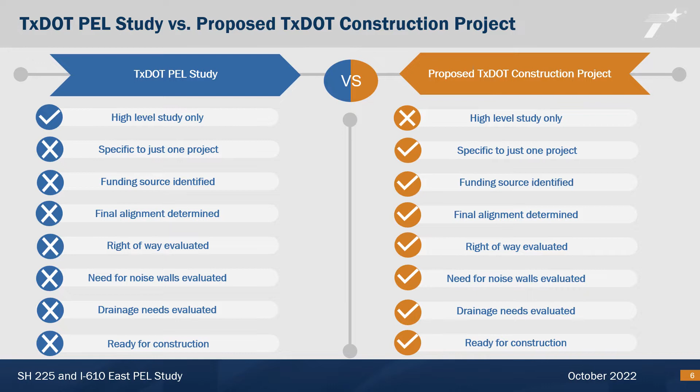A proposed TxDOT construction project is like building and planting your garden based on your earlier planning work. You would choose a specific place in your yard, determine how much space you would need, and then narrow down what you will plant based on the larger list you developed when planning the garden. Next, you would do all the work to plant your garden and then enjoy the benefits of fresh vegetables.

TxDOT is currently conducting a PEL study in Harris County of 2 roadways with specific beginning and ending points, referred to as the study limits. The State Highway 225 portion is approximately 14 miles long and includes the existing State Highway 225 corridor, beginning slightly west of the I-610 East interchange and ending at State Highway 146. The I-610 East portion is approximately 7.5 miles long and begins south of I-45 at Telephone Road, proceeds north over the Ship Channel Bridge, and ends at Gellhorn Drive.

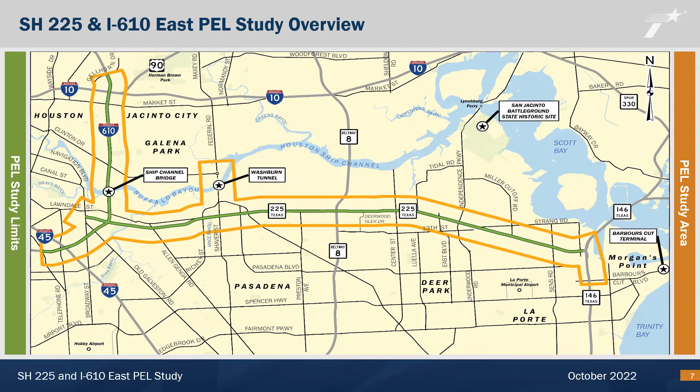There are 2 extensions of the study area: the Washburn Tunnel, located between I-610 East and Beltway 8 on the north side of State Highway 225, and Barbours Cut Boulevard, south of the State Highway 146 and State Highway 225 interchange. The study area includes 7 unique cities and supports significant industry in the area, including numerous petrochemical facilities and Port Houston container terminals. State Highway 225 also serves as the gateway to the historically significant San Jacinto Battleground via Independence Parkway.

There are 4 primary factors for why this corridor was chosen for a PEL study: safety, design, mobility, and community. Ensuring that all factors are evaluated with a focus on equity is key to the success of this PEL.

Safety is a top priority for TxDOT, which means identifying improvements to reduce crashes and fatalities is a crucial component of the PEL. Between 2017 and 2021, more than 200 serious crashes occurred within this corridor, resulting in 33 fatalities.

Design means the standards and specifications that TxDOT uses to ensure the highest safety and operational efficiency of its roadways. Due to the age of State Highway 225 and I-610 East, certain roadway components do not meet current minimum design standards. Mobility means enhancing the ability to freely move people and goods within the study area.

Both State Highway 225 and I-610 East are hurricane evacuation routes that must be designed and operated to provide a safe and effective option for evacuating people from the Gulf Coast region. Both facilities are also part of federal and state freight networks and are critical to the transportation of goods throughout the United States.

The community that makes up the PEL study area is a tapestry of diverse people, established neighborhoods, places of worship, schools, parks, and major employers. Identifying the transportation needs of the community through robust outreach and communication is key to enhancing safety, design, and mobility through this PEL study.

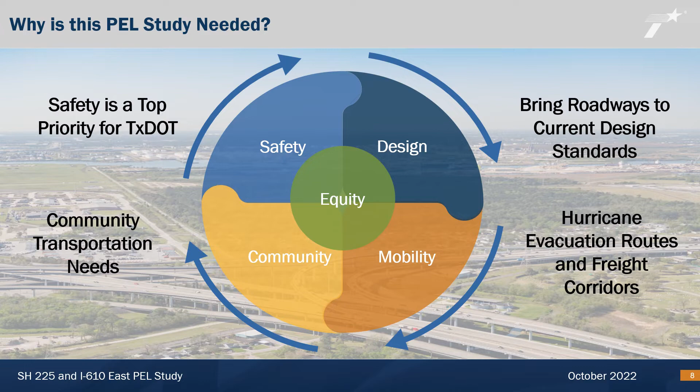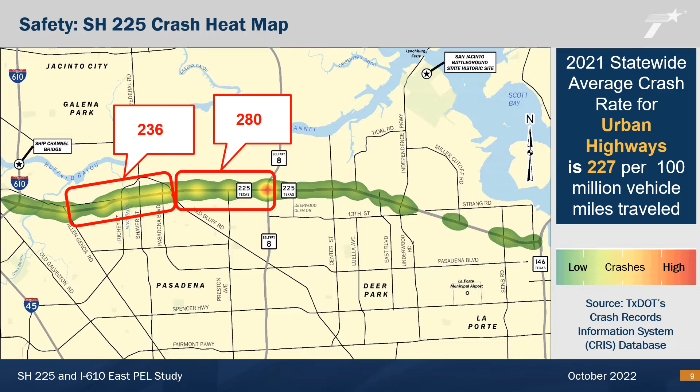The 2021 statewide average crash rate for urban highways is 227 per 100 million vehicle miles traveled. There are 2 locations on State Highway 225 that are above the statewide average. One is from Allen Genoa Road to Red Bluff Road, where the crash rate is 236, slightly higher than the statewide average. The second location is from Red Bluff Road to Beltway 8, where the crash rate is 280, or about 23% above the statewide average.

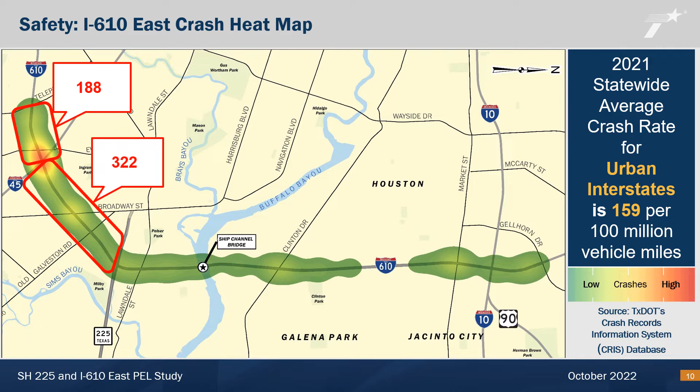The 2021 statewide average crash rate for urban interstates is 159 per 100 million vehicle miles traveled. There are 2 areas along I-610 East that are above the statewide average. The first location is between State Highway 225 and I-45, where the crash rate is 322, 2 times higher than the statewide average. The second location runs from I-45 to Telephone Road, where the crash rate is 188, about 18% higher than the statewide average.

The PEL study team obtained historic crash data from 2017 to 2021 to analyze crash and safety concerns within the study area. There were a total of 7,958 crashes reported during this time period, with 4,062 crashes reported along State Highway 225 and 3,896 reported along I-610 East. Of the total reported crashes, 70% occurred on the main lanes of State Highway 225 and I-610 East, with the remaining 30% occurring along the frontage roads.

15% of total crashes involved commercial vehicles. There were 28 crashes that involved pedestrians or bicyclists.

One approach to enhancing safety is to ensure roadways meet the most up-to-date design standards. The age of a roadway and the timeline of its construction often influence many critical design features, such as vertical clearances and right-of-way widths. The first portion of State Highway 225 near I-610 East was completed in 1966. Over the span of 30-plus years, construction continued moving east along the roadway and was eventually completed in the year 2000 at its current terminus with State Highway 146. Over this period, roadway design standards changed to adapt to evolving transportation needs, resulting in a variety of vertical clearances and differing right-of-way widths.

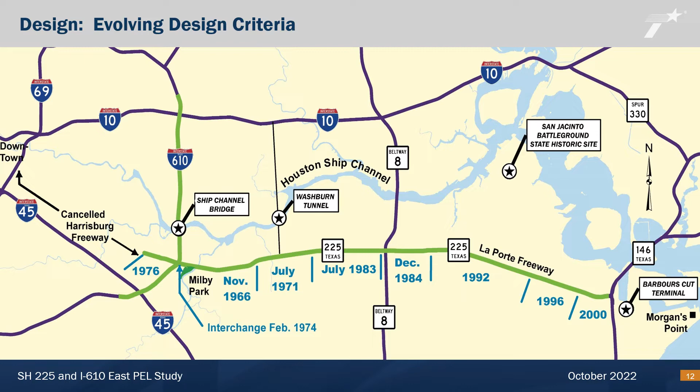I-610 East was constructed in the early to mid-1970s, including the construction of the Sidney Sherman Bridge over the Houston Ship Channel. The Sidney Sherman Bridge opened in March 1973 with a vertical clearance of approximately 135 feet. Modern-day ships require a much higher vertical bridge clearance, like the Fred Hartman Bridge and the Sam Houston Tollway Bridge, both of which have vertical clearances of 175 feet.

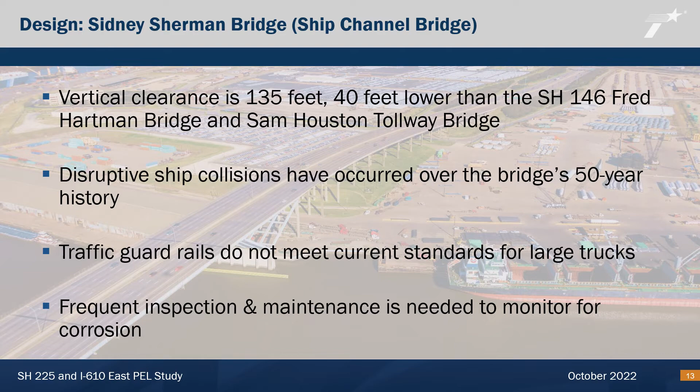The low vertical clearance of the Sidney Sherman Bridge has been a contributing factor to several costly and disruptive ship-bridge collisions. In addition to the insufficient vertical clearance, there are other key design and maintenance issues that require further evaluation, including traffic guardrails that do not meet current standards for large trucks and frequent inspection and maintenance to monitor for corrosion.

Another key transportation design feature within the PEL study area is the Washburn Tunnel, operated by the Harris County Toll Road Authority. The tunnel is the State Highway 225 connection point to Shaver Street, Richey Street, and Red Bluff Road. It is also used as an alternate route from I-610 East to connect to refineries and neighborhoods on the north side of the Sidney Sherman Bridge.

The tunnel opened in 1950 and has been on the National Register of Historic Places since 2008. The tunnel is a two-lane roadway that goes beneath the Houston Ship Channel. The top of the tunnel is 45 feet below the waterline and limits how deep the Houston Ship Channel can be dredged in this area.

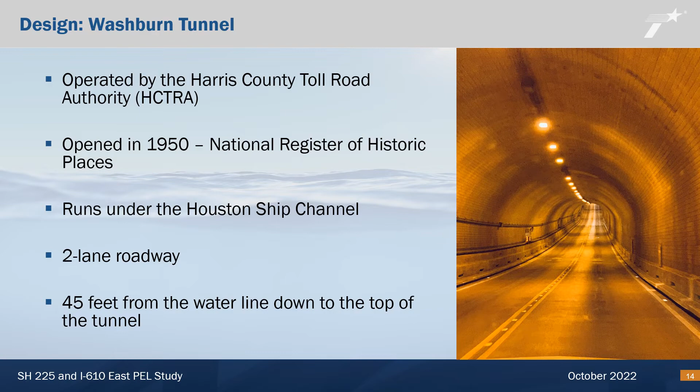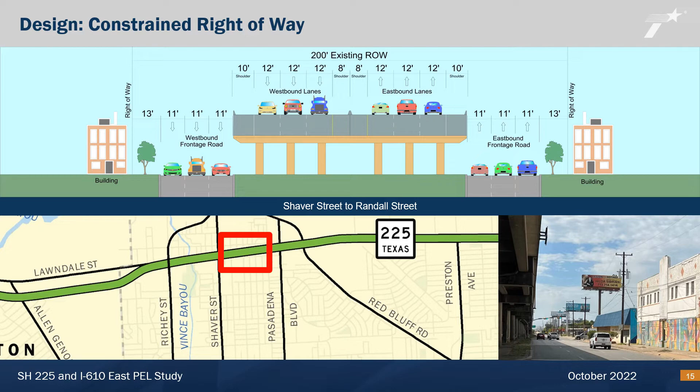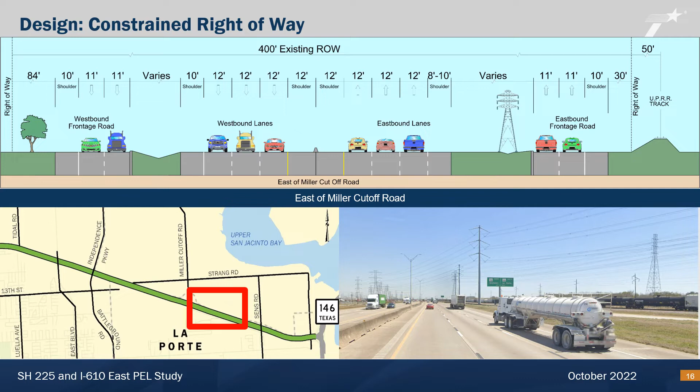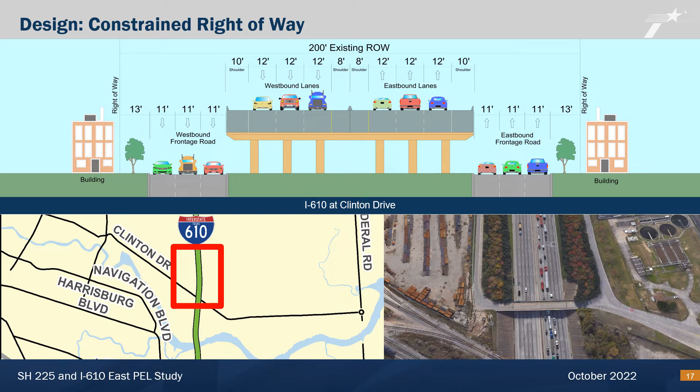Another example along State Highway 225 is east of Miller Cutoff Road. This section is constrained due to the location of the railroad and utilities, such as high-voltage transmission towers. Right-of-way constraints also exist along I-610 East. Although the right-of-way widths vary, the location of refineries, Port Houston, and other significant infrastructure may impact future roadway improvements.

Mobility is another factor that will be evaluated during this PEL study. Houston TranStar data from 2021 was used to summarize the travel times along State Highway 225. Average free-flow travel time, both east and west, is 13 minutes. Along State Highway 225, the most significant difference in travel times occurs westbound during the morning peak.

During this period, the amount of time it takes a typical vehicle to travel from State Highway 146 to I-610 East more than doubles from 13 minutes to 30 minutes. Currently, there are no direct connectors at the Beltway 8 and the State Highway 225 interchange, which could be contributing to increased peak hour travel times. However, TxDOT is working with the Harris County Toll Road Authority to construct direct connectors that would reduce delays during peak hour travel and enhance mobility and safety.

On I-610 East from Telephone Road to Gellhorn Drive, the average free-flow traffic time is 5 minutes. The most significant delays occur during the evening peak hours, both north and southbound on I-610 East. During this time period, the travel time almost doubles to 9 minutes for the average vehicle.

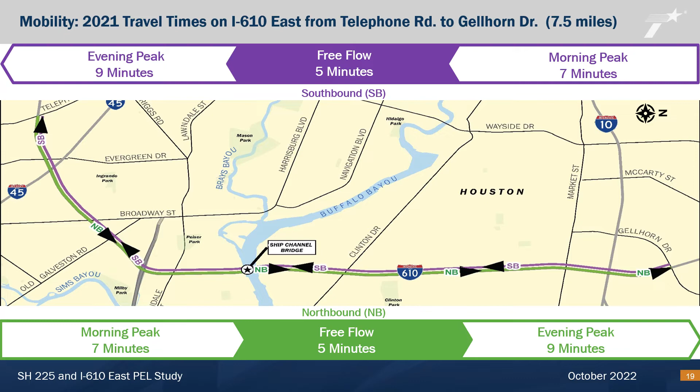In addition to the vehicular travel patterns within the study area, the study team will consider other transportation improvements to incorporate, such as managed lanes, truck-only lanes, transit, and ride-sharing.

Current and projected traffic volumes at specific locations along the corridor are represented by the white circles. The volume of vehicles traveling through a specific area in 2021 is shown in light blue at the bottom of each circle, and the volume predicted for 2045 is shown in dark blue at the top of each circle.

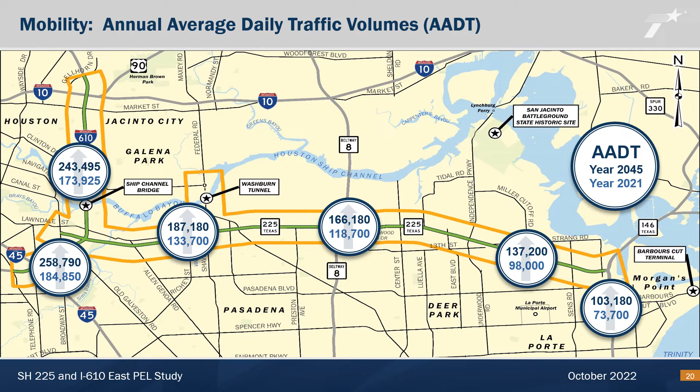According to the TxDOT statewide planning map, the future annual average daily traffic is predicted to grow by approximately 40% in both the I-610 East and State Highway 225 corridors.

State Highway 225 and I-610 East are linked to many strategic Texas supply chains, such as manufacturing, petrochemical, and Port Houston container terminals. Both roadways are part of state and federal designated freight networks and are critical to the timely movement of freight. Commercial vehicle volume on I-610 East ranges between 8 and 9% of total traffic volumes. The percentage is higher on State Highway 225, ranging between 16 and 21% of total traffic volumes.

Identifying and analyzing commercial vehicle issues, needs, challenges, opportunities, and strategies for moving goods along State Highway 225 and I-610 East will be a key component of this PEL study.

Safety, design, and mobility are all important components of the PEL study. However, understanding the unique transportation needs of the surrounding community is equally important.

There are 7 cities adjacent to and within the study area, including Houston, Jacinto City, Galena Park, Pasadena, Deer Park, LaPorte, and Morgan's Point. Community organizations in the study area include the Pleasantville Area Super Neighborhood Council, number 57, and the Clinton Park Tri-Community Super Neighborhood, number 59.

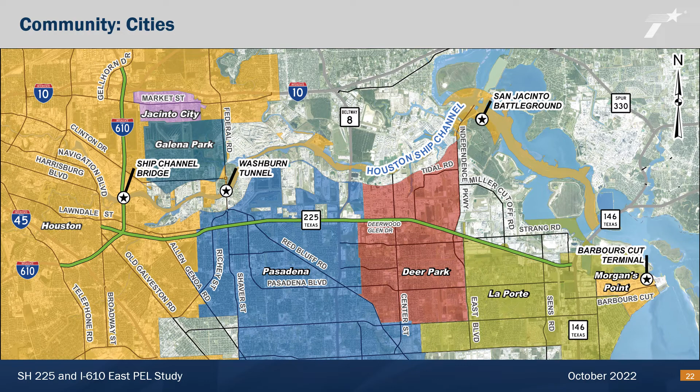The community within the study area consists of a highly diverse population, with 87% of the population identified as a minority, according to the Federal Highway Administration Order 6640.23a.

This order defines a minority as a person who is Black, having origins in any of the Black racial groups of Africa; Hispanic, of Mexican, Puerto Rican, Cuban, Central or South American, or other Spanish culture or origin, regardless of race; Asian American, having origins in any of the original peoples of the Far East, Southeast Asia, the Indian subcontinent, or the Pacific Islands; or American Indian and Alaska Native, having origins in any of the original people of North America, and who maintains cultural identification through tribal affiliation or community recognition.

The largest minority group within the study area is Hispanic, making up 77% of the population. Black or African American make up the next largest minority group at 8%, followed by Asian populations at 1%. The remaining minority population consists of people that are some other race or mixture of races other than white.

Individuals who do not speak English as their primary language and who have a limited ability to read, speak, write, or understand English may be considered limited English proficient, or LEP.

Data from the 2020 U.S. Census indicates that approximately 30% of the population, partially or wholly contained in the study area, speaks English less than very well and may qualify as LEP. The predominant language spoken within the study area by LEP individuals is Spanish.